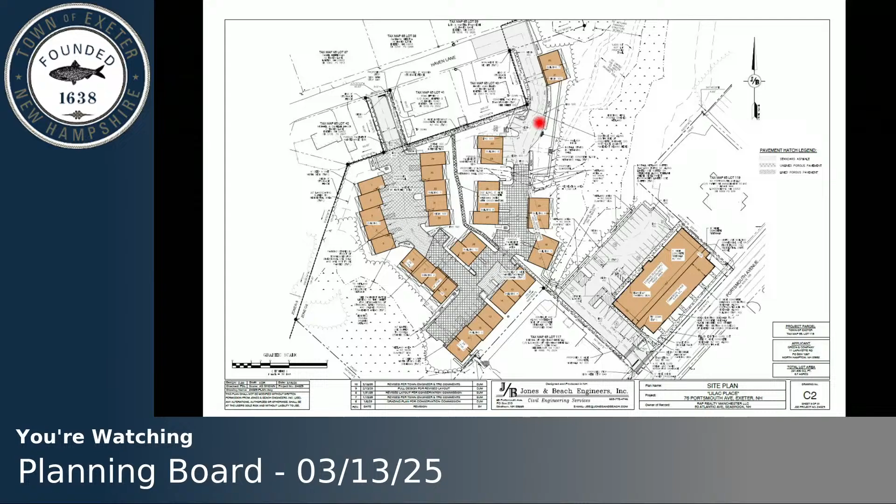The other change was addressing concerns about maneuverability getting into some of these buildings that have no parking spaces in front of them, especially building 2, and this building up here, as well as this one. We were able to widen the road in those sections to create more turning radius for vehicles to get in and out of those garages, and also provide space for them to back out without backing directly into the travel lane. That should address that concern as well.

The other change that we made. Mr. Chair, I'm sorry to interrupt, but we don't have this printout, so could you tell us the building numbers? Yes, and I did bring some handouts, sorry to interrupt if you'd like them. But it's really important to know what building you're talking about, and I can't see from here.

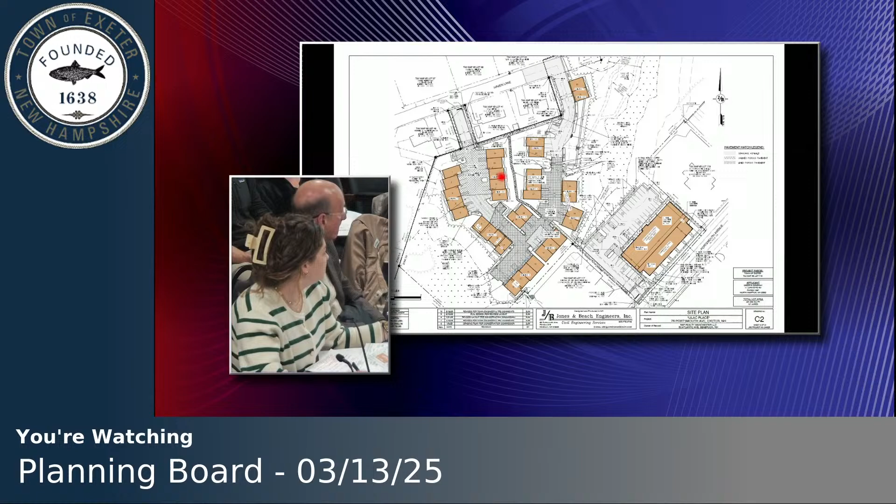The buildings that we've added the jogs to are building 2, building 3, and we did add some jogs to building 11 as well. There was 1 jog, but we've added a second one to break that up further since it's 5 units. So now our maximum width of a building is 5 units versus the 7 we had previously.

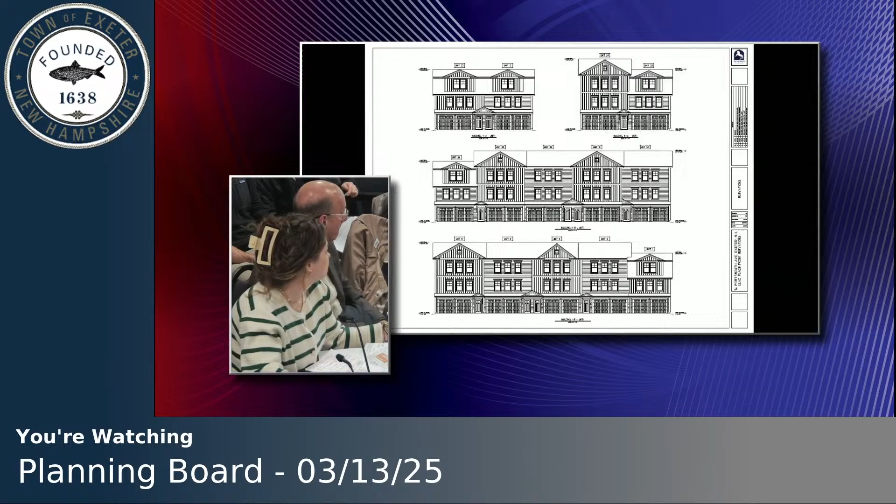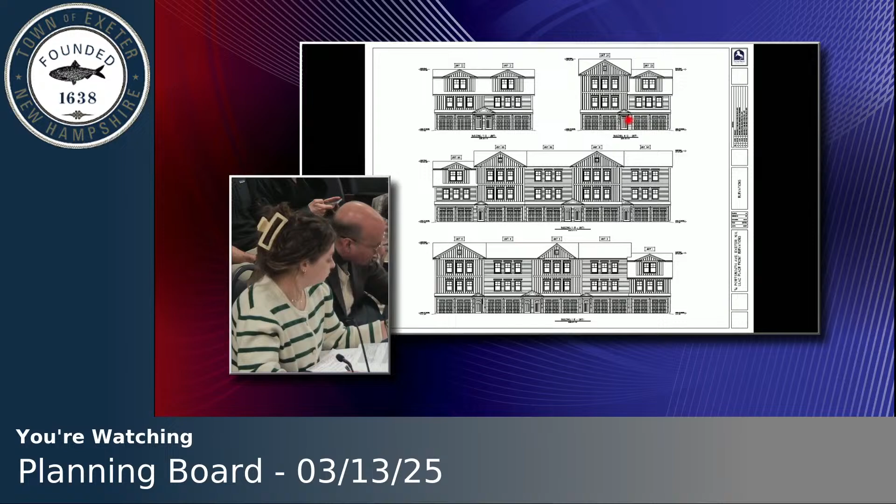The second page of that attachment is the revised architectural elevation. We took a look at some of these elevations, and on the buildings specifically close to some of the abutters on Haven Lane, we were able to drop the height of some of those units down to 30 feet tall instead of 35. So you'll see here, this is building 8, building 8, and then building 1.

And building 11 is the other one. So the units that are closest to those abutters will be 30 feet tall.

And again, these are preliminary. When we resubmit prior to our next meeting, we'll have a complete set of all of the elevations, because I know the board did want to see that as well. And it's hard to depict on these as well, the horizontal jogs in the building. It looks totally flat, but with the jogs that are shown on the site plan, that is how they will be constructed. So that'll add some additional depth as well.

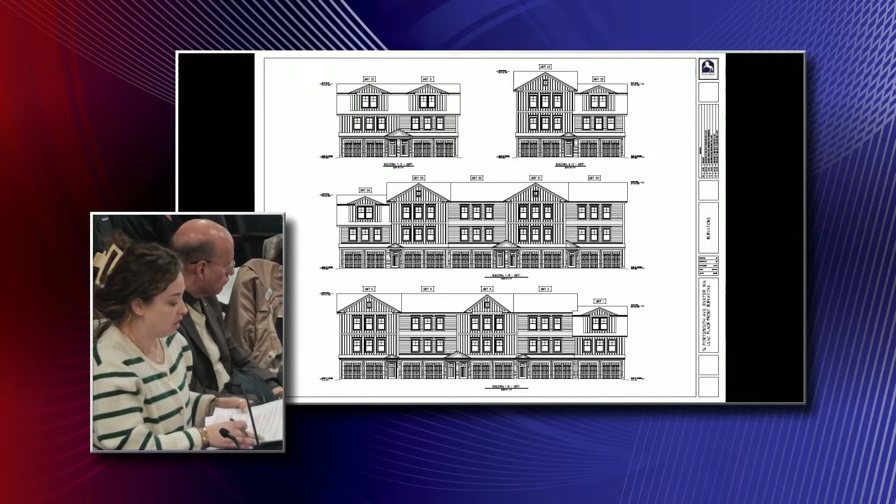So those are the changes we've made so far. We do also have the Underwood letter that we've received, and we're working on addressing those comments that they had on some of the technical details, and we will be resubmitting.

So the next topic that we wanted to get back into was traffic. Just as kind of a refresher, because I know some of the board members weren't here last time, we started to talk about the traffic memo, and the fact that Kim, our traffic engineer, has had conversations with Jason as well as town staff, and heard from the abutters about some of the existing traffic issues that exist in this neighborhood and along Portsmouth Ave as well.

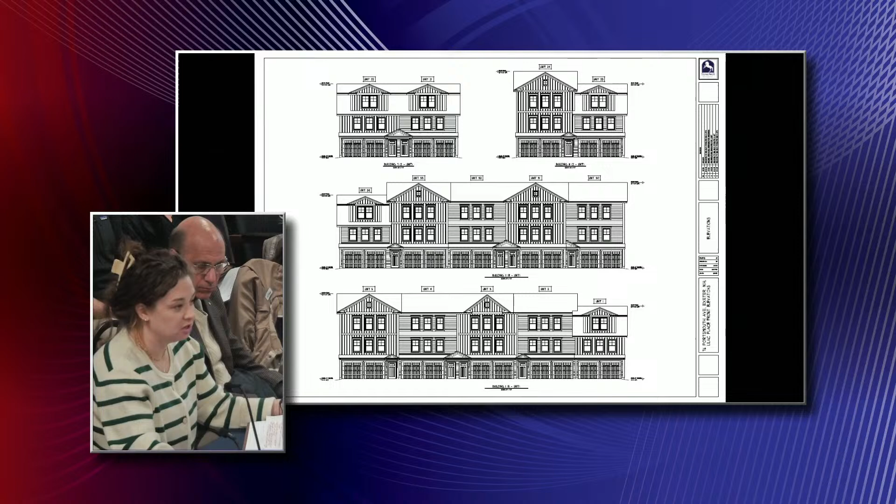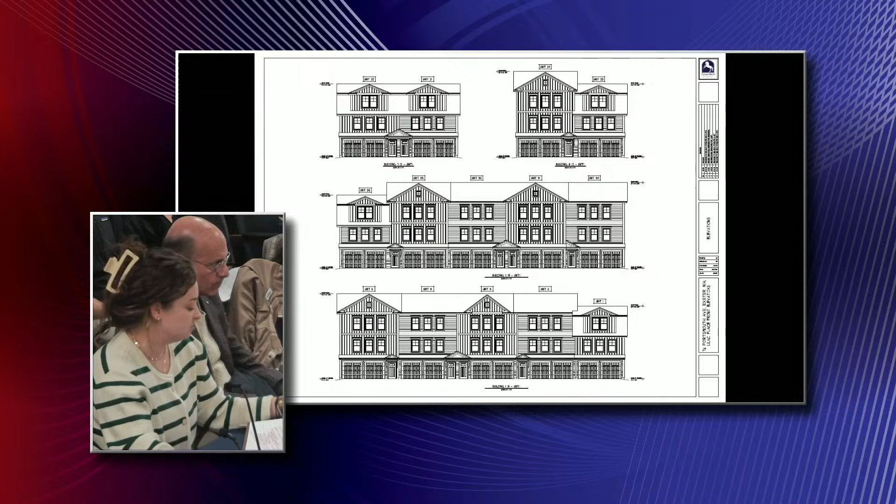So we felt that it would better benefit the town if we propose to make some kind of a contribution toward doing some improvements of those areas versus spending that money to do a traffic study that's just going to tell us the issues that we're already aware of. We felt it would cause a bigger impact to the town to try to improve those scenarios that are already existing. So Dave kind of summarized that at the last meeting towards the end pretty well, so we wanted to just get back into that discussion.

Okay, well, we have Jason Plourde on the screen. We do, and I'm happy to go over and minimize this if we want Jason to be on the screen too. Yeah, probably do. So yeah, let's do that and focus on the driving situation, traffic pattern.

I watched the meetings. I did. Interesting discussion.

I don't know how to actually get him up. Yeah, Gabe will do it. Okay, hopefully he's listening. He's listening.

Good evening, Mr. Chair, members of the planning board, Jason Plourde with VHB. Good evening. And I'm here to be able to help address any kind of questions and concerns that you may have.

Okay, could you provide us with an overview of where we're at with the traffic that you folks have done? Yes, so we had reviewed Dr. Kim Hazarvartian's traffic memo that he had put together dated November 5th, 2024.

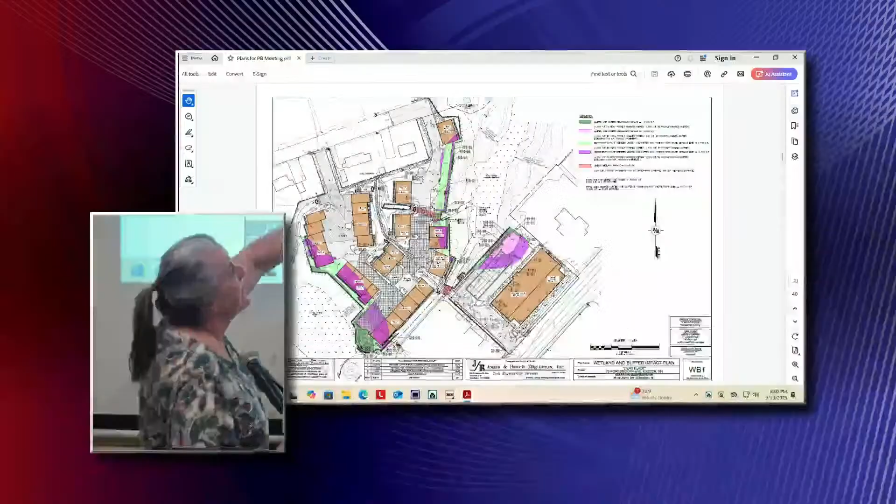Either way, we know that it's wetlands. When you build on it, you leave all this pink area, and it looks up here and it says poor drainage or something to that effect. I can't read the blur. I think what you're referring to is it talks about very poorly and poorly drained soils.

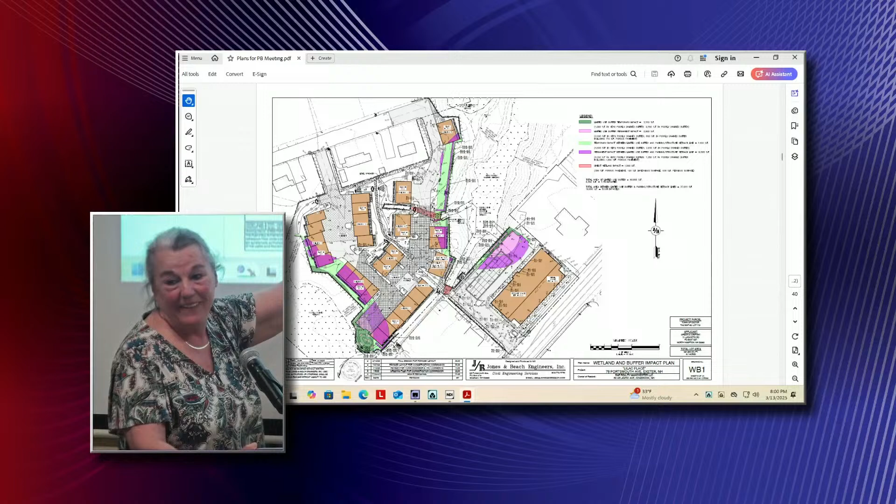But the colors that are shown are not very poorly or poorly drained, it's just buffers to that. So the town has different buffers based on what the soils are. The crow's feet marks are what you want to look at, ma'am. No, this is poorly drained, and this is the wetland itself.

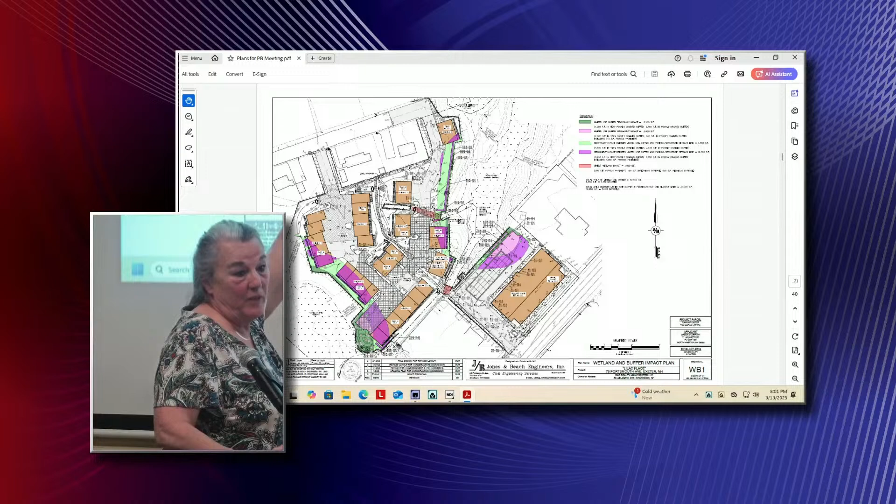See these little hatch marks? This is all against our land. So when they put all these buildings on there, where's the water that was originally going to be sitting there after a big rain or that huge snowstorm that melted a ton of snow going to go? It's going to be draining here, is what I'm thinking. And that's a potential for water damage. I'm curious, if that happens, who's going to be liable?

Just to point out, about 90% of the projects that come to the board have wetlands, so we have to deal with them. This is not new to us. The Conservation Commission has reviewed this very thoroughly and made recommendations, so we tend to follow their recommendations. It's a good question, really, and an obvious concern, no question about it. Wherever you go in Exeter, high or low, there's going to be wetlands right next door. That's just the way it is.

I wasn't trying to be disrespectful, it's just a concern we've been having. I want to reiterate, please give us a fence. We have this huge buffer now, and you're taking it away, which helps with the noise and the light. I would really appreciate if you include that.

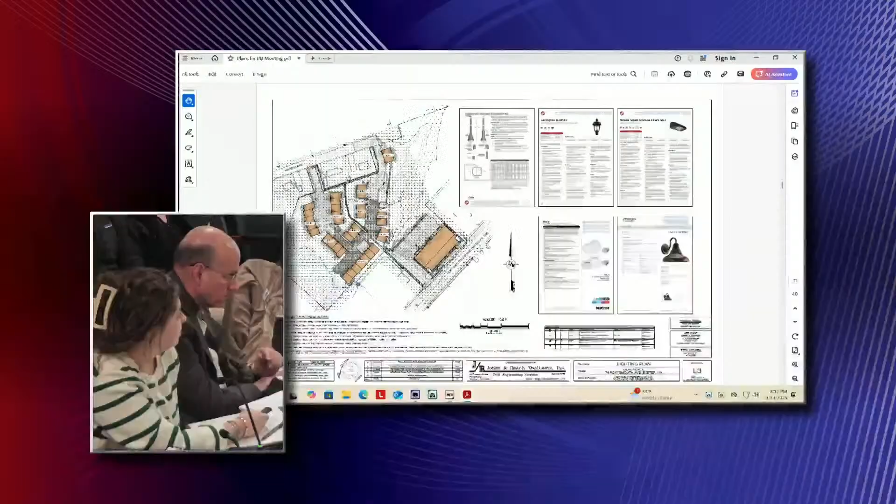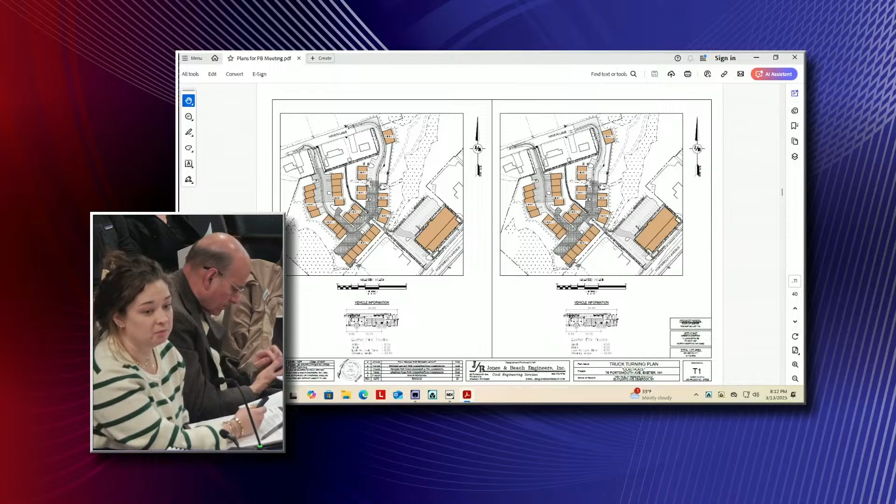We do have truck turning plans in the plan set, which show a fire truck coming in, making that turn, and then being able to exit. We did show the parking striping in front of the units. That won't actually be striped, but it's there. That came up early on at TRC just to depict that cars could be parked there and it won't interfere with a fire truck. But you were going to reach out to the fire department as of our last meeting. Has that happened? Yes, we have reached out to the fire department. I've not heard back. I don't think they had any further concerns about the truck.

The main reason we were going to reach out was regarding the hydrant location. That came up at TRC. We can certainly confirm with them again. It was also the need, why is there a need for that extra exit entrance? And it was, you said it was because of fire trucks, school buses, and deliveries. Correct. But no one had any information on what the fire department's position was. That was a request of the fire department at TRC. Well, there's no meeting minutes, so we don't know. Stay tuned.

Jason Fretz, the deputy fire chief at the TRC, was concerned about the original plan. They had to kind of get in, and then it was difficult to get back out. And then there was a suggestion made to loop it, and then they came back for that. It started with my question on whether or not that extra entrance exit could be gated and only used for fire apparatus, like we have at Sterling Hill. That was what started that conversation, if I'm not wrong. I could reach out to have a further discussion with Jason. Yeah, that's literally what started that part of the conversation. I recall that, and I think we took a look at that after the meeting.

Would it be one way? You'd have to go up to the mic to ask. Sorry, you can go back up. I can ask it for you. Would it be one way? This is currently not designed as one way, this is two way. Thank you. All right, now you got to go up.

We've been in the neighborhood for 28 years, and when a fire truck, probably about 25 years ago, tried to maneuver in that corner because we live straight on number 30, that fire truck went round and round the neighborhood. And that is the widest area.

If you've been through the neighborhood, I do park my bus in front of my house during the daytime. And I was told that any cars, well, we have a guy that parks his trailer on the road on Bonnie Drive nine months out of the year and doesn't take it off the road.

However, a fire truck, especially the extended ladder truck, to take that right turn, they're going to have to try it. They'll have to maneuver going up and around because it's a straight truck. It's not going to be an easy turn. So that's why the concern was inquiring to the fire department.

And as for the fire hydrant, it's in front of our house, so it's not far, but I don't see how it's going to maneuver. If it went one-way traffic, and once you start getting people parking in certain areas, that's a bit of a concern if it'll fit. That's just my question, my concern.

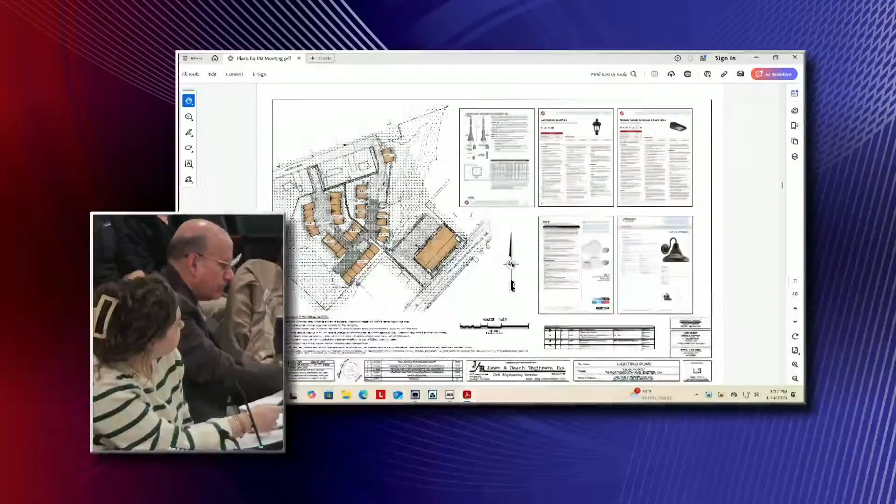Can I describe the process that goes through? The process is that the developer creates a truck turning plan, and Jason also provided the Exeter fire truck dimensions to us as well.

We used those dimensions to run the template. They provide the truck, and it creates a template to show the turns, and it shows you can make them. They review that. Sometimes you can make it if you do it perfectly, and if you don't do it perfectly, sometimes you run over stuff, and that does happen. But to the extent of this, it gets reviewed by the fire department, and they say okay or not, and they were fine with this proposal, that they felt they could get in and out.

So does that apply to school buses too? Right, thank you, because that was the other thing, the length of the vehicles. You said you needed it for school buses. Yeah, so the comment that came up about the school buses from Underwood, they asked us to run the school buses. That's not something we ordinarily do.

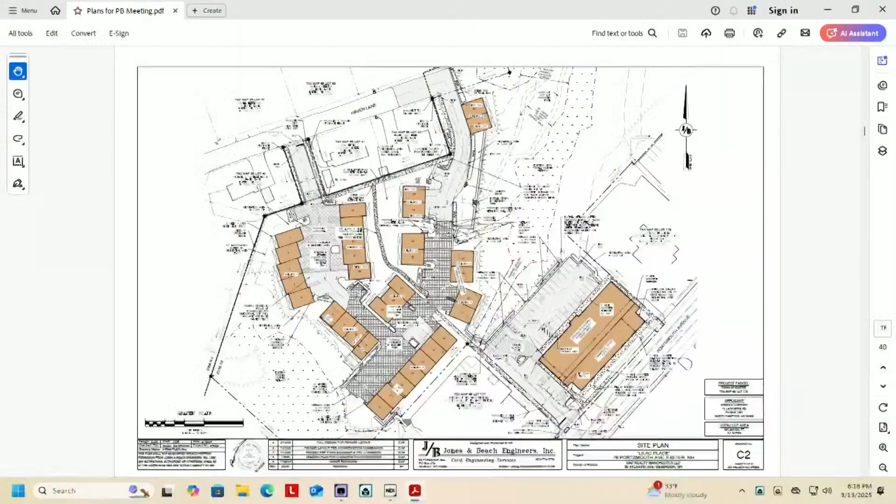So where would the kids in this development get the bus? At the end of this neighborhood, I would guess, but I don't know, maybe at Susie's house, at the end. Where are children picked up at this time? Right now, they're at the corner of Bonnie and Green Hill.

They take a left onto Clover. I take a quick left onto Clover. It's the hardest neighborhood to drive a bus, one of the most challenging bus routes, because the traffic is crazy for the kids. When I let them out, these children go toward Clover, behind and around the back of me, and down Bonnie Drive, so they're dispersed in many directions. And you just tell them, make sure you're safe, look both ways for cars. It's scary, and everybody's racing for that stop light.

Thank you for being a bus driver. Thank you very much, that's a job we don't recognize enough. We've got a lot of people like you who get all our children to school safely. Thank you so much.

Well, I think we're pretty well set for this evening, and I would look for a recommendation, or a motion perhaps. Mr. Chair, can I just ask a quick question? Sure, just because I think it could be addressed in the revised plans, if it's something that could be addressed.

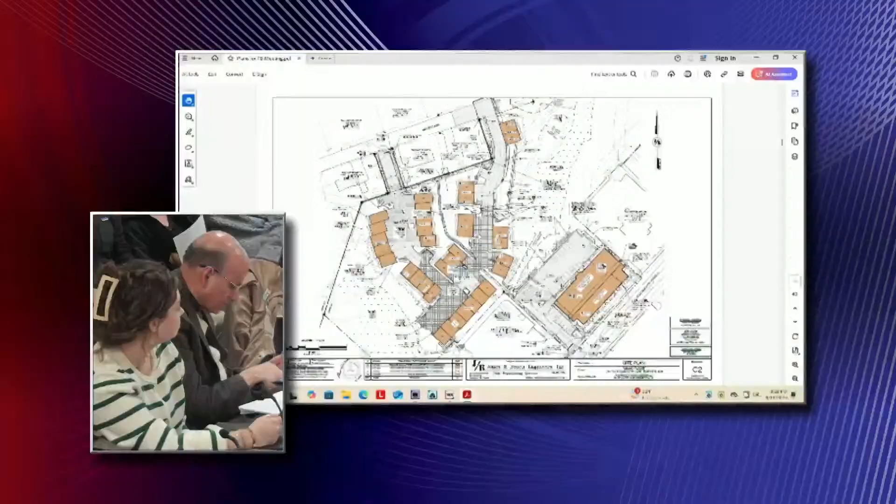No, we do have a phasing plan which shows where the sidewalk will go during phase one. The sidewalk comes basically right down the edge of their parking. We've shown them our limit of construction, so they know their parking will be temporarily impacted while it's constructed, but once complete, they'll be able to park again up against it just like ordinarily. So it runs right down that property line.

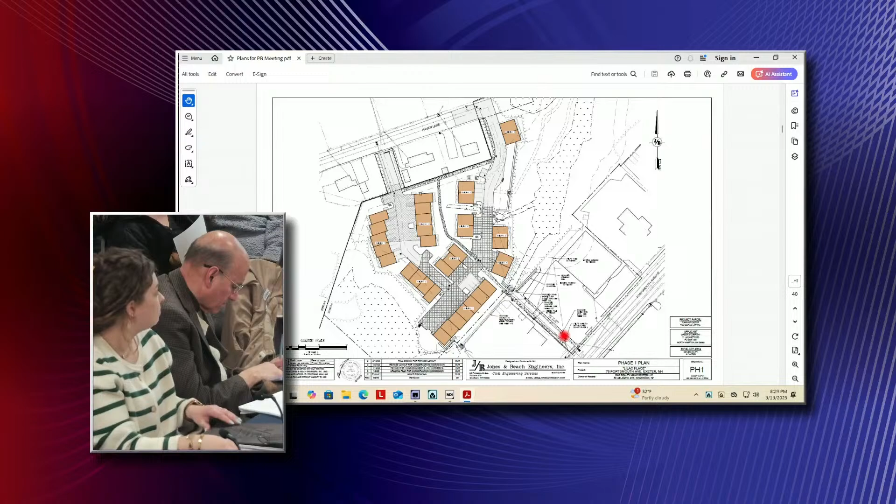On building number 7, you showed us a couple schematics of a 30-foot building rather than 36. My question is, since those don't have garages, it seems that could be applied to those buildings, or make it a little playground for the neighborhood. I don't think it was 7, it was 8, 11, and 1, right? Correct. Was 11 too? I'm sorry, was 7 included?

It's these four in the rendering you handed out tonight. Let me pull mine up... so it's building 7, 8, 11. Oh, it's not 7, 7's not shorter, 7's the same. Okay.

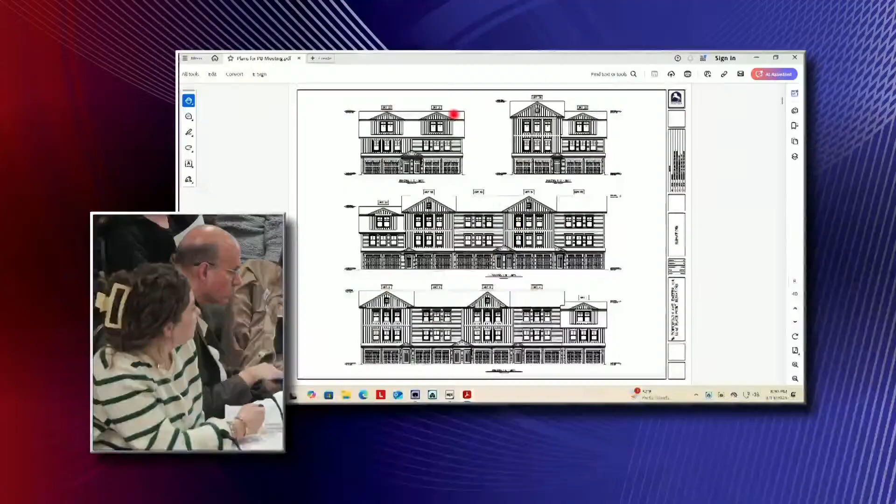So building 7 is the shorter height. That's what this one is right here. Oh, the whole thing is shorter, it's not a step down? Okay, that's what was confusing me.

Got it. Okay, so I think they're gonna bring them next week too, but you can have them in the meantime.

Are you ready with a motion? Yeah, so I'm going to make a motion to continue planning board case number 24-8 to March 27th, 2025 at 7 PM at the Nowak room. Second. Moved and seconded.

Does that work for you guys? You gonna get plans by the 20th? We won't have the rendering, but we'll have everything else addressed, the Underwood.

Do you want to come back, or do you want to wait until you have the first meeting in April? Well, could we come back, could we resubmit with the plans, then bring the renderings to the meeting? That's up to the board, I guess. How's our agenda in general?

Open right now. Okay, so how do you feel about it? It's okay. I mean, the renderings, that's not that technical at this point, it's just modifications really. Looking at views and stuff, the visual is more important. But how much time do you need ahead of the meeting for that?

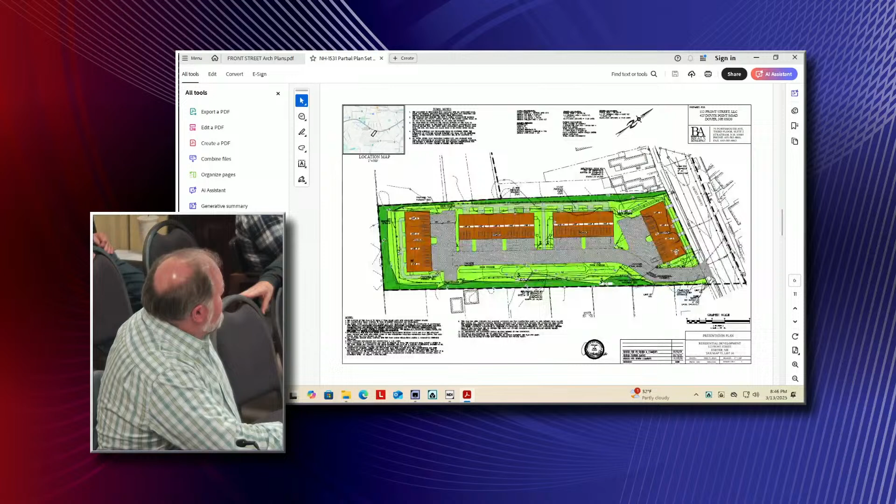And how close is that building to the property line? From the property line, it varies. I should say from Front Street, from the sidewalk, you're looking at about 10 to 12 feet, because it's not a perfect parallel. Yeah, that's what it was.

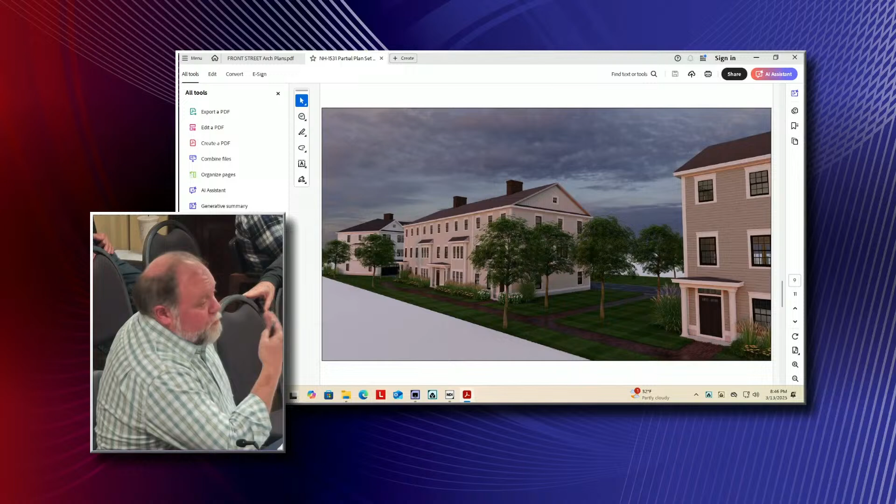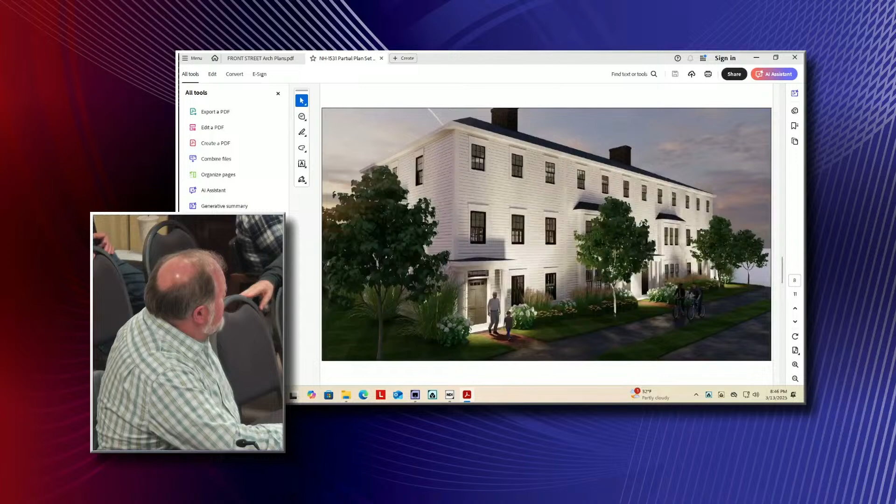And this is a view of what would be the rears of the building to the parking area. You can see the walkway, it's a little bit dark in that particular slide, but that's got the walkways back there. It shows the proposed landscaping, which we did provide a revised landscape plan as well, done by John's designer.

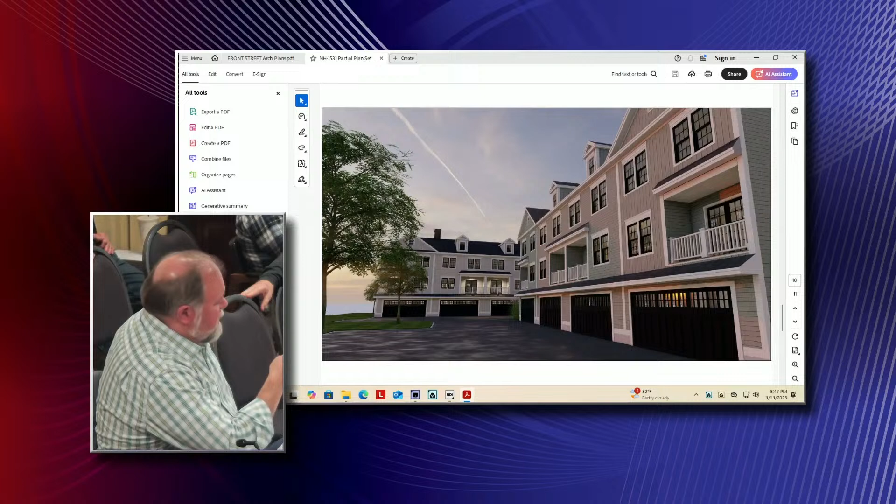And there is a view from the interior of the property looking at the garage entrances. That building in the back is the furthest one away from Front Street, and the rear of that abuts the cemetery. I think that's a 4-unit building. So the front of the back building is facing the cemetery. Correct, yeah. And the garages all face the drive aisle.

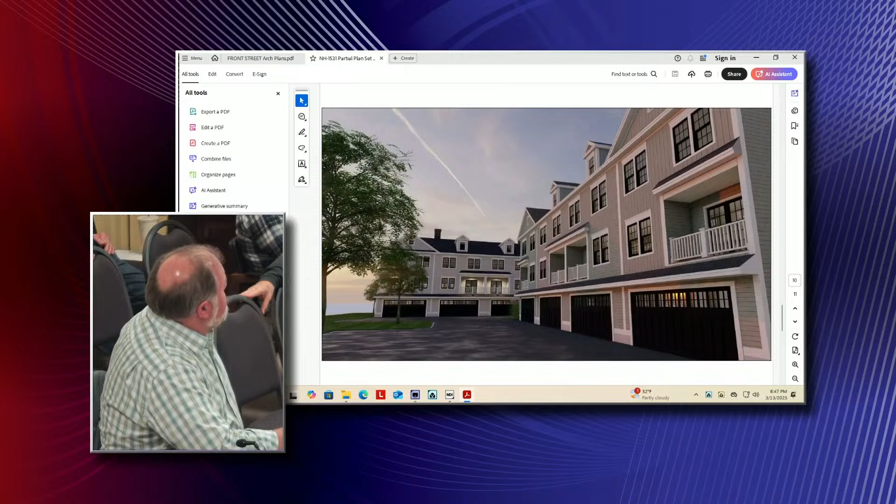And let's see, yeah, the use of a little color there is good. That helps separate them a little bit. And you can see again, he did dormers, and he changed the gables on the ends of these units as well, to try and address that plain look that you had discussed in the previous hearing. Oh, that's good.

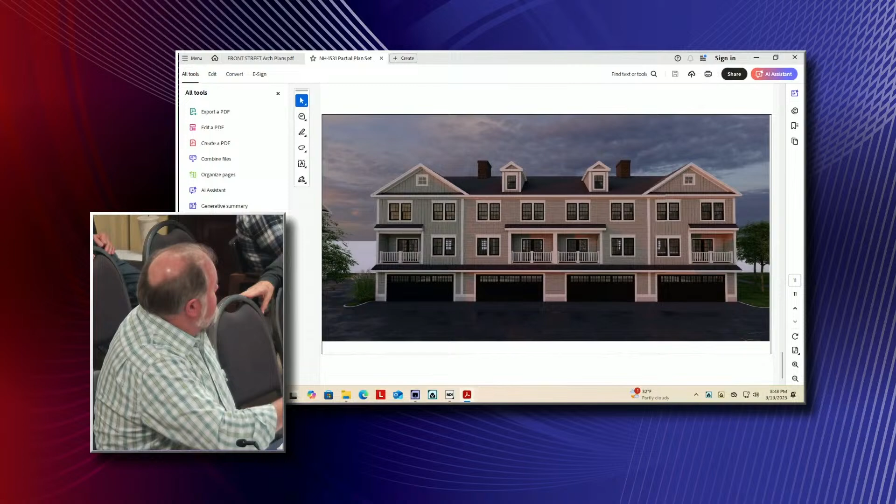And with the revised drainage, the revised entrance, and those differentiations in the architecture, that is the lion's share of material changes to the design itself. And we did incorporate much of the comments, or edits, to deal with many of the comments in the final Underwood letter as well. So with that, I'll entertain any questions you folks might have.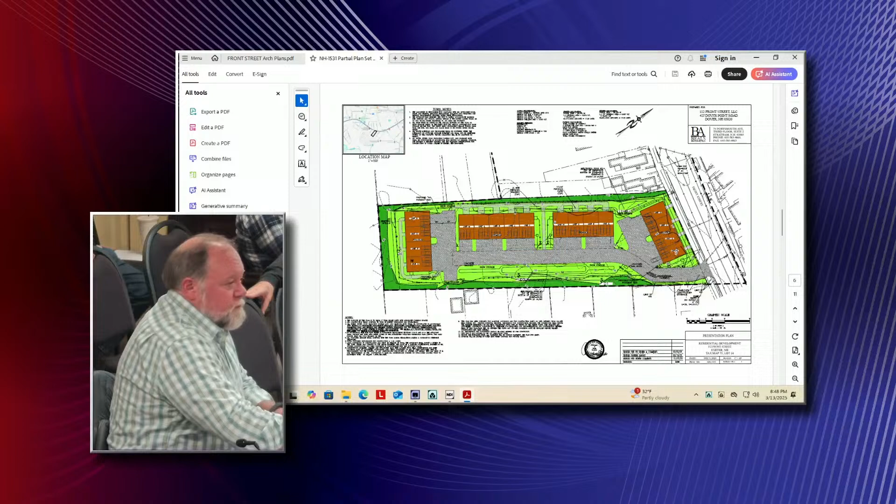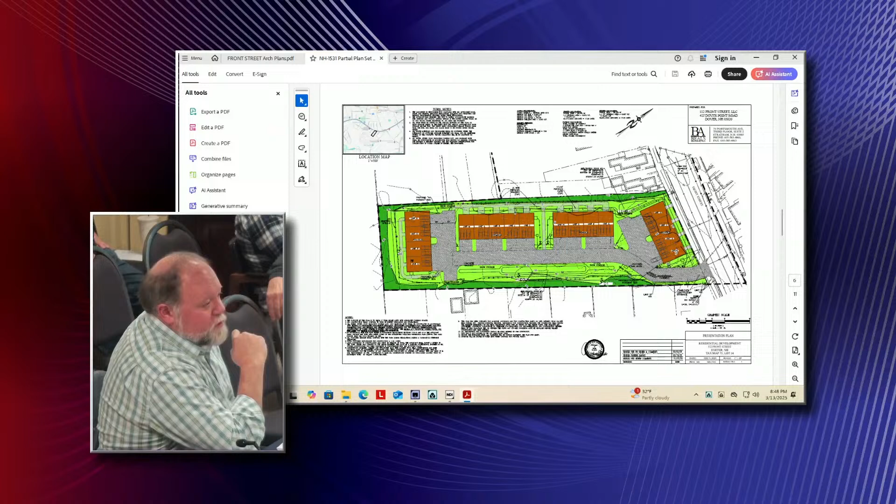Address the waivers when appropriate. Did giving the driveway 5 feet affect the location of the front building at all? We had to slide it just a little bit, probably 4 feet. I think we had to slide the building 2 feet, just to make sure we have enough area for the vehicles to make that initial right-hand turn.

And then, if that's the case, approximately how close to that single-family home? So it's still going to be in the neighborhood of 20 feet. 16? I can go to the microphone if you need me to.

Questions, comments? Oh yeah, that's right, excuse me, go ahead. I apologize, the building on that side of the footprint didn't move. We took a foot out of each of the units, so we shrunk the building a little slice.

Coming from the southeast, so is that distance the same as it was before? Which was, I think, around 10 feet. We meet side setbacks on that side by a couple of feet, and then it's whatever the distance is from the property line to the existing building on their property. But just to clarify, so the western end of the building has not changed from the last time we had the plan? Correct, same spot, yep.

Questions, comments? A lot of paper shuffling going on here.

How about where the driveway is 5 feet wide? What's being done with the landscape drawing? There was some fencing there, which would be necessary to keep headlights from people turning in. So the fencing is going in there. There are some plantings that are going to be installed on both our side of the property as well as the abutter side, in collaboration with them.

We have also added that same fence along the abutting property with the folks that own 9 Gill. So the fence is not solid all the way back, it's partly based in what the neighbors have. I think we've got about 98 linear feet from the front, and then there's a gap, and then I think it's 60-something feet, 69 feet across that.

Well, I just want to make sure that all the neighbors have had that opportunity, and I sense that they have. I just want to be sure of that. Dave was saying earlier, what we treat one party with, we need to treat all of them. I see a head nodding no, so there's one abutter you need to talk with on that, I guess. Same thing on the other side?

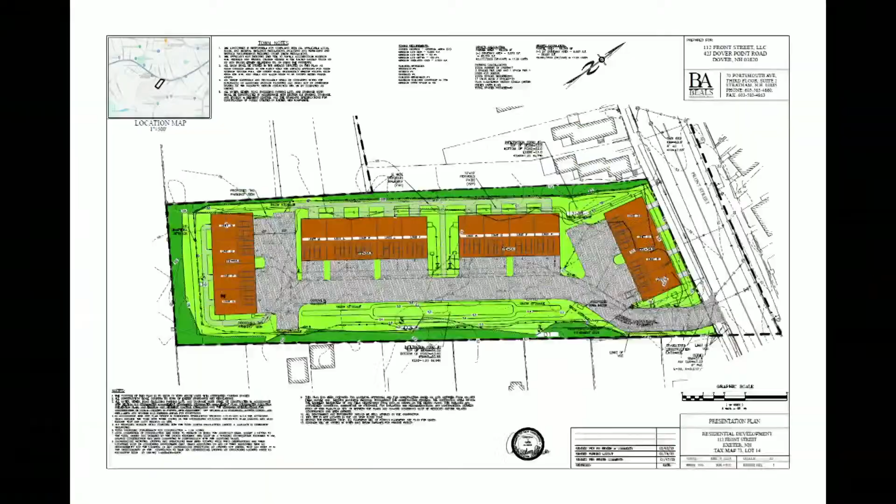No, on the other side, you can see all the existing trees as well as the in-planting trees that the designer has added. All of the existing trees, plus she proposed plantings within those existing trees to provide a better buffer and a better screen, but no fence that I'm aware of.

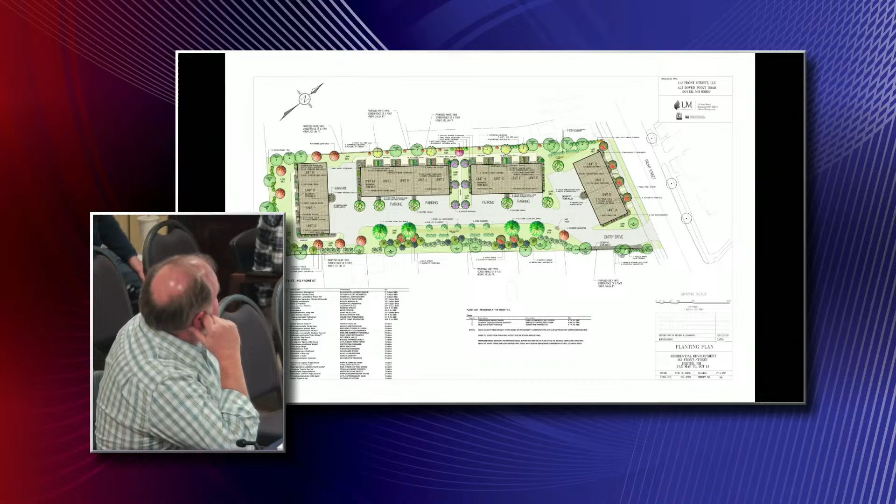John, am I incorrect on that, on the northerly side? It's 106 feet on the plans. Yeah, there's a fence along the whole right-hand side, Christian. The neighbor's got one, and we're continuing down, almost halfway down, to a white fence. See the note top left? The proposed white vinyl screen fence is 6-foot height, 106 linear feet.

But then it breaks up, it doesn't go the whole way - there's 106 feet, then 24 feet, then there's a break, and then there's 132 feet, in three sections. I think what she was intending to do with those sections is not put fence where it would damage existing tree roots, as the plant plan showed.

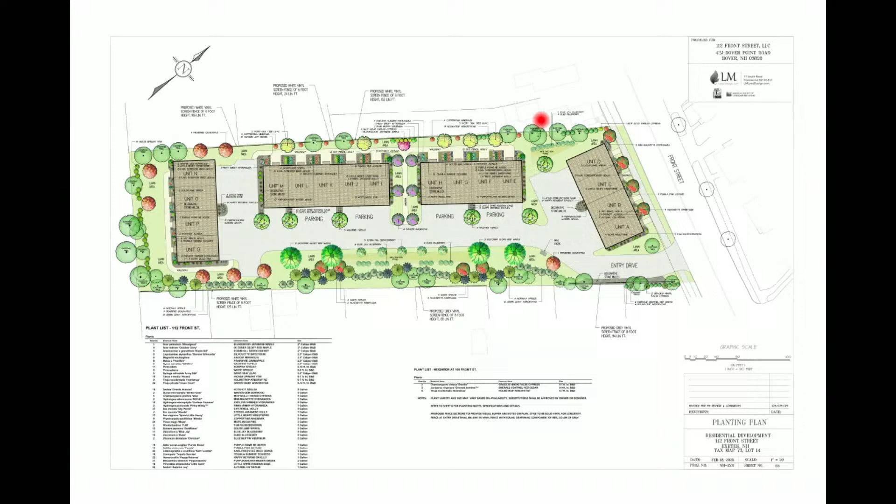As a matter of fact, one thing she did add, when you're pulling into the first building, she created screening so that there'd be no light damage. Could you use the microphone, please? Yes, we added screening so that there'd be no light pollution coming through as you drive into that first building. So she blocked that all off.

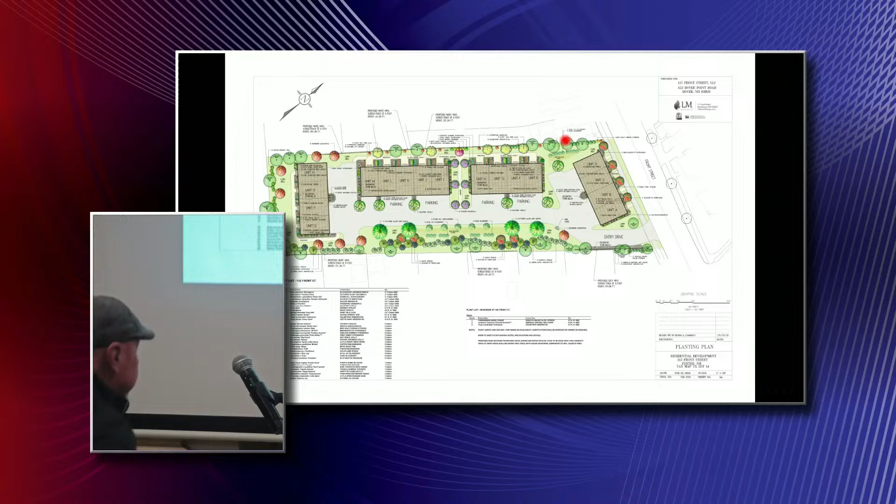Why are some of the fences gray and some are white? I believe that was the abutter's choice on the gray one. And the gray one's actually going to look like stone. It's a beautiful looking fence, 8 foot tall. It has sound capability as well. I don't know if we have a picture of it, but Adele, you've seen it - it's a good looking, very good looking fence.

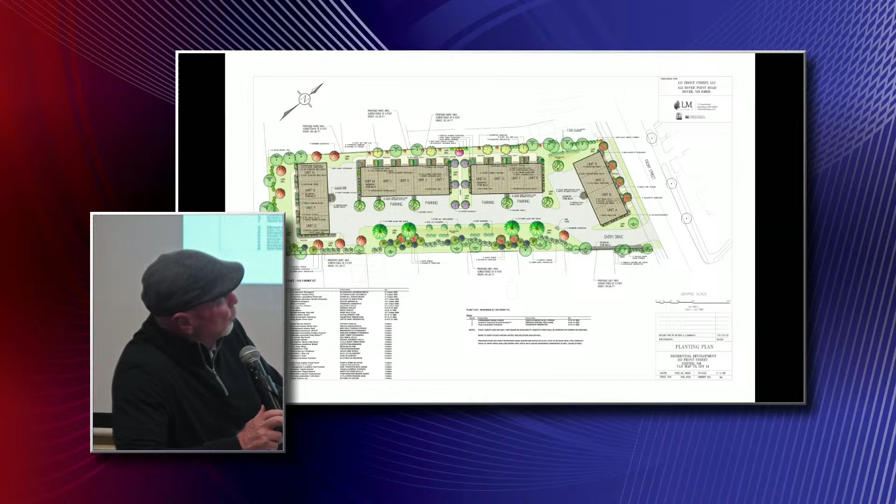It's a vinyl fence, but it's not just vinyl - it's vinyl both sided with a sound rating in between, and that's 8 foot tall. It makes sense, she was the most aggrieved with lights coming in there, and we planted trees there as well. But we didn't think it was necessary to do it on the whole property, because the other side of the property is already covered with the white fence.

Well, that's good, because all the traffic coming in and out goes right by that, through that driveway. Exactly, of course.

Nancy? No, a lot of my concerns have been addressed in this, most of them, yeah. I'm good, thank you.

Thank you, over here. Okay, that's beautiful, thank you. Oh, there we go. Do you mind if we pass your phone down, you can just come along with it? Keep touching it so it'll stay on. If you come along with it, you can hit it if we need you to. Oh, I see. Thank you, I'll bring it over.

Oh, that would be a little sound deadening. Final? Wow, okay. Do you want it? No, I've seen it. Mr. Smith, I'm going to put you through your paces right now.

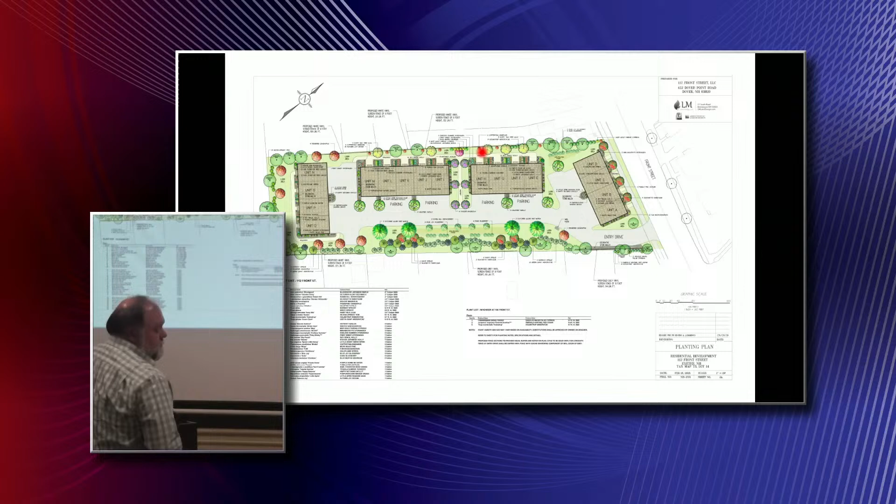That last lilac, and nothing else on down to the... So the front third to the street is existing vegetation - there's no additional fencing there, right? There's an existing fence on the neighbor's property. How tall is that fence?

6-foot white vinyl. But you also have additional plantings, so that plantings should help keep headlights from the existing fence going across. I think she's got them on here.

That's why I'm asking you to go through this. I can't read it - if you look at some of the trees there, does she have the existing fence? I can see that. I'm saying the existing trees - she doesn't show the existing fence on the front section because obviously the surveyors didn't trespass to get the location.

Okay, all right, well it'd be helpful to have it. We can certainly stand on our property and see the fence there - I guess we can see it, just add it to the plan, because it's a detail that I think is important. It's important, sure, you know. Oh, it is, yes. Not a problem, thank you.

I have a question about the architecture. In our packet, there's an elevation facing Front Street. There's A1A and A1B. What's A1A and what's A1B? I believe... Sam, can you get on there and switch to the other drawing?

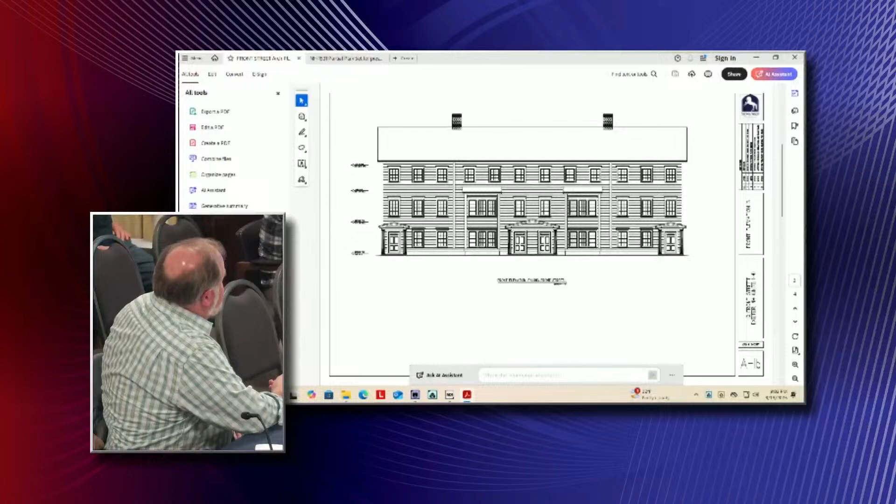So which one are you proposing? What are we looking at? Which one's right? I think it's 1A. Let's go back to the first page. That's the front, that is the front. Front Street, right there, front on Front. No, you have two, but then they say they're on Front. Flip to B.

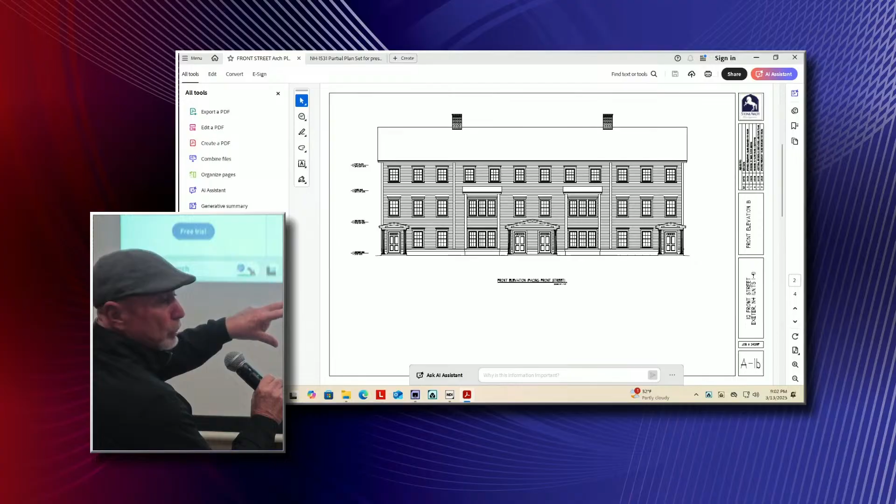So B is not Front Street. That is one of the side buildings. It says facing Front Street, but that's a mistake — it's not. Oh, okay, so that's just architectural. That was the architect being misleading. In reality, we're doing the hip roof on Front Street, so the hip roof's on front. This is for the other three going along the side, and then we're going to do a hip roof along the cemetery. So hip roof on two ends, and then there's the back of the Front Street building right here. So B is the two perpendicular to Front Street. Right. Okay, thank you for clarifying that.

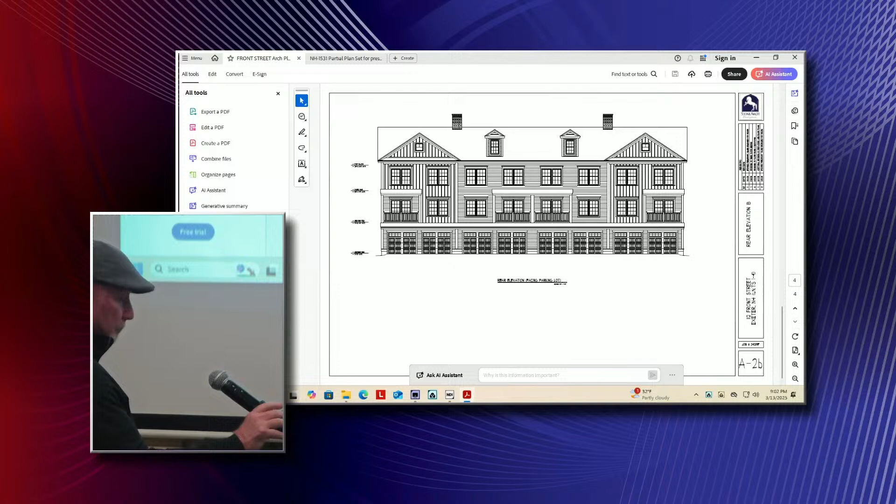Okay, thank you. So I also have a comment to follow up on that question. I really appreciate those 3D views that were done — I think they're really helpful to see, as opposed to just the flat drawings. I can't get over the feeling like these buildings are backwards. Even before, we were like, so that's the front? No, is that the back? What's the front? You're inside the community.

It is the front — I mean, really, these buildings are all gathered around this central space, even though it's basically parking. Well, it's unique, the way they kind of create this U urbanistically. I feel like all the fronts of the buildings should be facing there, and then you've got these beautiful frontages facing the backyards, facing the neighbor's fence and trees. It's like a backyard — I wouldn't want the front of my house facing the back of my neighbor's house. That would be weird. Well, you have to have function, and the function of these buildings is you have to drive in, so you don't want to create any more pavement than you need to.

So this is a nice-looking building, in my opinion. It doesn't look as nice as the other side, but this is what people are going to see as they drive in right here, because they have to have function, they have to drive in. Yeah, so it's function versus reality. But I mean, we saw in the other project, you had the garages and then the front doors were in the front. But remember, I don't even think architecture is part of your purview in this particular zone.

Nothing personal, but I don't believe it is — oh, actually I believe it is, yeah. We can comment on that. Well, you can comment on it, but your regulations don't have any architectural standards for multifamily in Exeter. And I think, Jen, the intent was just to have the more aesthetically pleasing side of the building facing the abutters closest to the abutters. So in order to get into your house, you've got to open the garage doors to get in from this side. Correct. Yeah, this isn't just about aesthetics.

So what's the finish on the outside of the back of the buildings? We're going to be using a wood product - SmartSide, very nice product. The windows are going to be all black, and we're going to change the colors. I think the diversification of colors makes a difference, and to make them look better we cross the striping and the pattern, so you get the board and batten look. We try to make it pleasing, we really do. It's not a typical townhome, but it is unique.

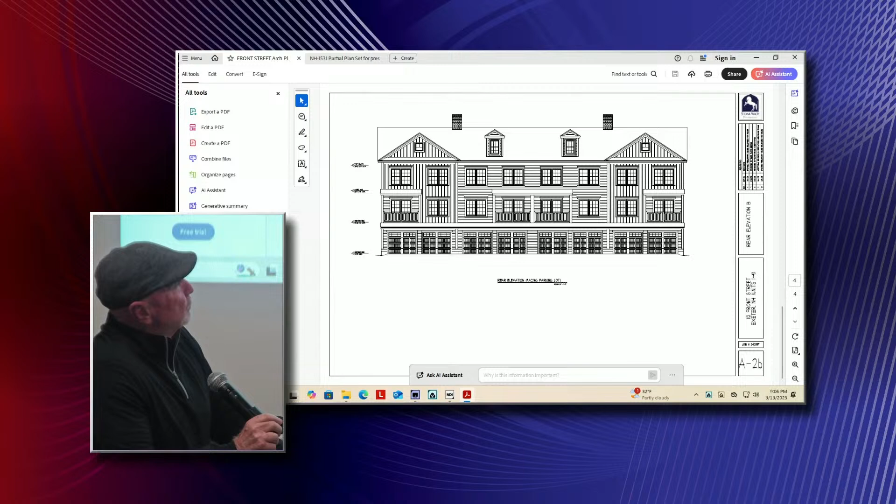I understand what Jen's saying about the other project - it's driven a little bit more, and it takes away from what I think is the better function. These are very, very nice functioning units. When you have a two-car garage to drive into, guests will park in front, but they can walk around back. They have a nice walkway, there's a nice finished room in the basement, and it's pretty private out back. We thought it was the best use of the property. I like the building an awful lot, I really do.

Looking at it from another angle.

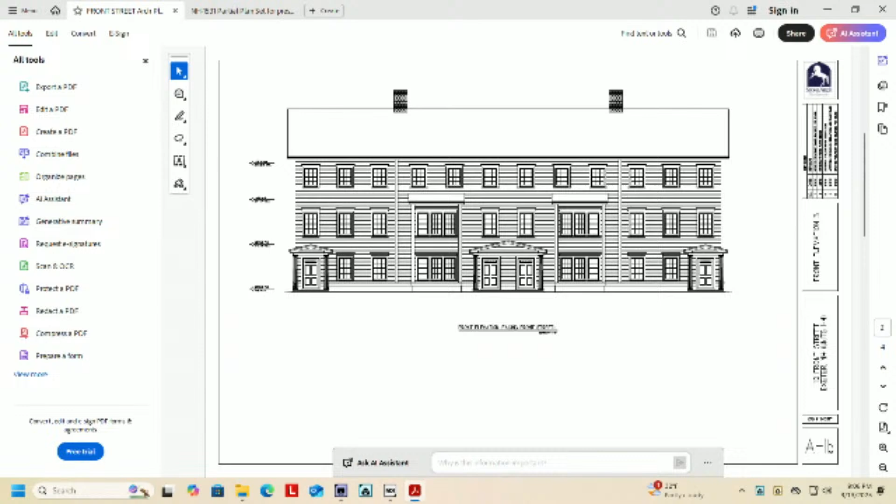You want to see the gable one? That's one of the side buildings, looking out at the neighbors, to be quite frank - so that's what they're going to look at. How much distance are we off the sideline on that particular road? When they walk in on the right-hand side, how much space do they have between there and the fencing and the property - 25 feet, 30 feet?

So for the two middle buildings, behind the building? I'll have to get back to that plan to give you a handle on it. It tapers a little bit, it's not perfectly parallel, but somewhere around 20 plus feet. So they get a nice backyard in there, and they have some privacy as well - that's their private area, it's their function.

But the functional area has to be the garage - you have to get into it, they have to drive in. It bugs me, I'm sorry. We've done this in Portsmouth and Dover, we've done it in a lot of communities, it's been done in Rochester. We do this quite a bit, and it's very successful.

I've got to say, Jen, I live in a single-family home and I've got 3 exterior doors I can easily use to go in. But 9.5 times out of 10, I pull my car into the garage and go through the basement and up the stairs. That's effectively what they'll do here. Yeah, most people do that - I think that kind of goes with that type of house.

Can we see the front street view of the front? Is that not it? That is Front Street. That's the hip roof. And it's a white building?

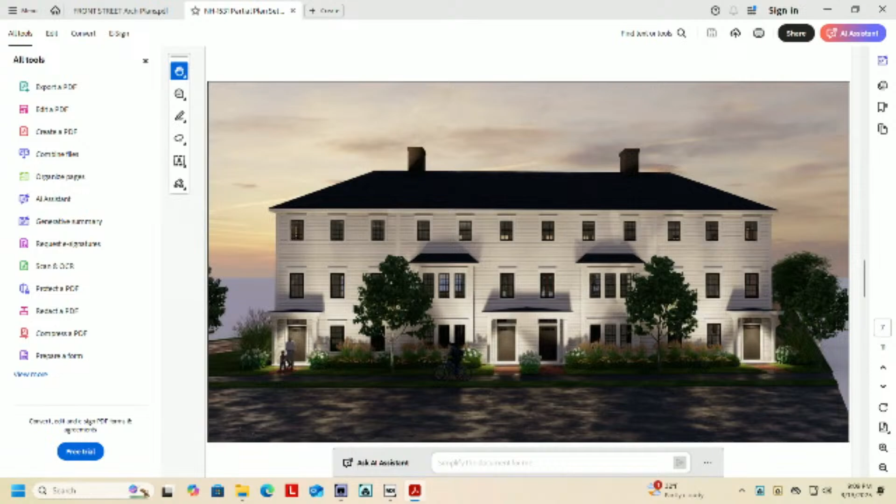You apparently have architectural say. Have an old farmhouse, that's all. It does break it up more. No running water, no electricity. This is a little different than what you put in our package though, it doesn't have the same windows.

So you're saving as many trees as you can, mostly along that, well, all around. Existing tree, right, yes.

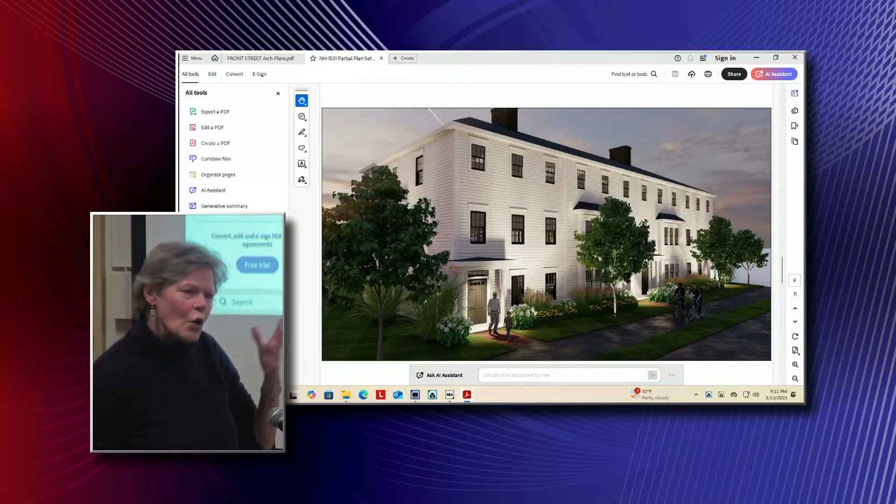Yes ma'am, my name is Dale Atkins and I live on the corner of Front and Gill. This doesn't show the size, the mammoth building this is. It's like a fortress compared to the surrounding houses in this neighborhood. It doesn't relate any way, and there are going to be 4 of these massive buildings. The whole thing seems totally inappropriate, and you have so many, it should be 10 units at the most, as opposed to 17.

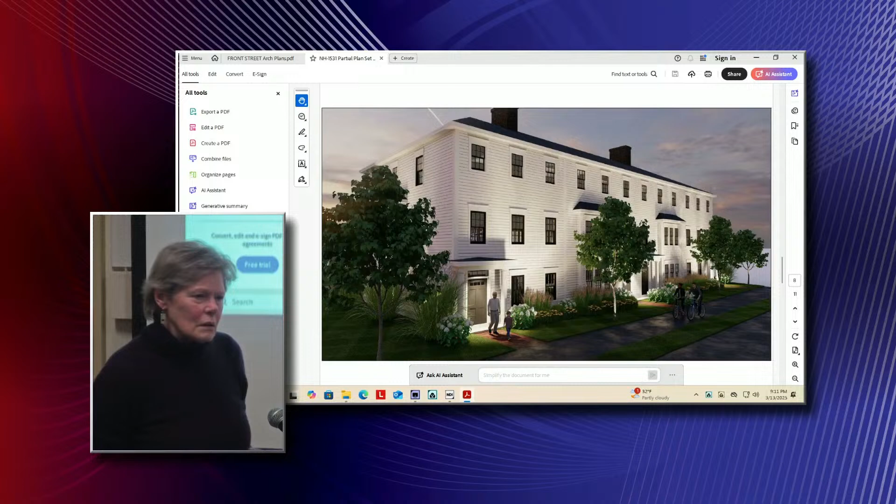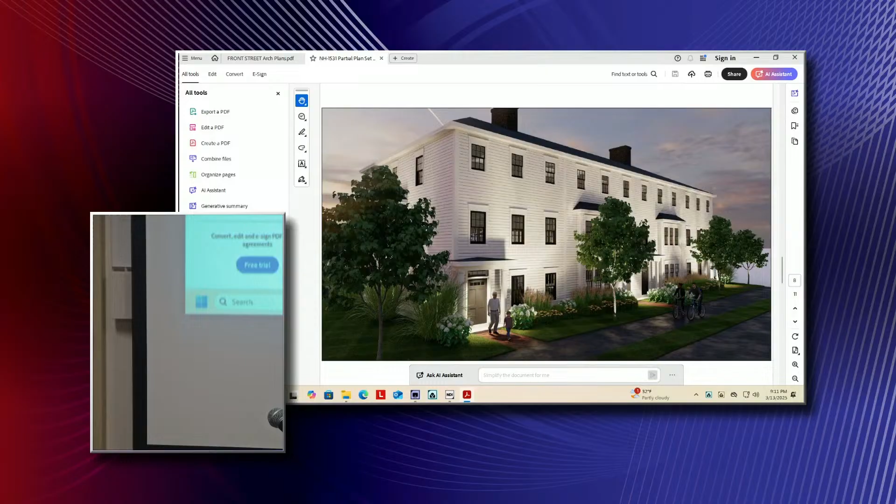How tall is the existing house? Do you know offhand? I don't know, do you guys know? Approximately 30 feet, so this is taller than that. It's in the same range.

Mr. Palmer, you go with this. Oh yes, come on up and speak if you'd like. Bill, 111 Front Street. The approximate height of the current building is 30 feet, so we've got at least 4 feet higher than that, for perspective. I've got some other questions, but that was, I wanted to come to the microphone to do that.

That's probably not, that's the back. Good evening, I'm Bill Campbell, 7 Riverwoods Drive. I'd just like to make some additional comments to what I said in the last meetings.

I'm wondering why we're trying to jam 17 units cheek to jowl in this lot. Seems to me to be a bit much. I have trouble envisioning 4 large solid buildings, each 96 feet by 24 feet. Actually the other one is 120 by 24, and each of these massive buildings is about 35 feet high. Does this massive set of 4 buildings fit into a neighborhood of separate single-family homes, each of which is on a separate lot? Do they fit in with the older homes on Front Street, which was the initial claim of the builder back in January?

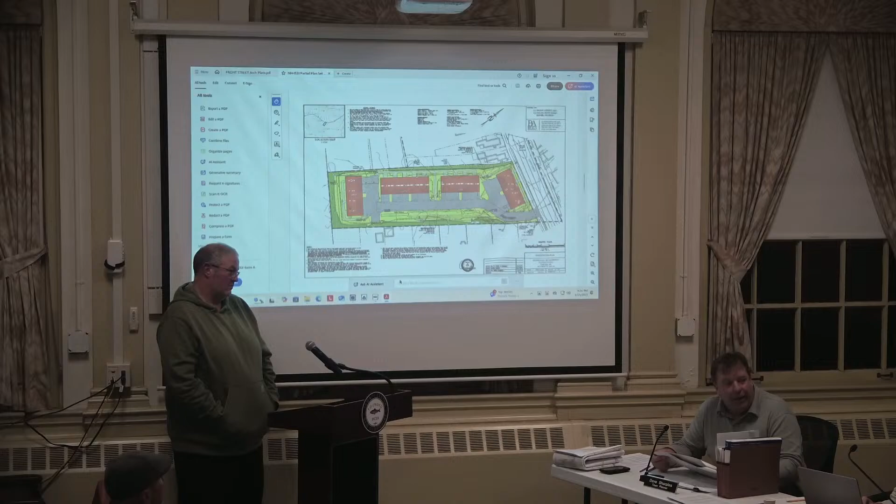You take that square footage out, and the parcel area is 69,349 square feet. You minus the driveway area, 24 feet, 9,687 square feet you take out. You got 59,661 square feet left. You divide that by 3,500 square feet, and it's 17.05 units. So it's allowed, that's what they get.

That zoning density predated me. It's been that way, I don't know how long. Had I shortened the road even further and condensed it, I could get more yield, to be quite frank. It's just a matter of taking the road out. And this is the business I'm in, unfortunately. I'm a land developer. I build and develop based upon the rules handed to me by the community I'm working in. So I looked at the rules and I adhered to the rules. That's all I can do.

Mr. Chairman, if I could, just very quickly on the density - I understand this looks like a lot of density, but this is also a 1.6 acre lot, which sits in the middle of quarter acre, third acre parcels. The front lot to our southeast is a fourplex on 0.33 acres of land. I think 11 Gil is a duplex on 0.28 acres of land. This is not outlandish density that the applicant is requesting here.

But I just want you to look at it - I think I'm comparing it with the rest of the neighborhood too. Understood, but there's not such density anywhere in that neighborhood. He just went through a couple examples though.

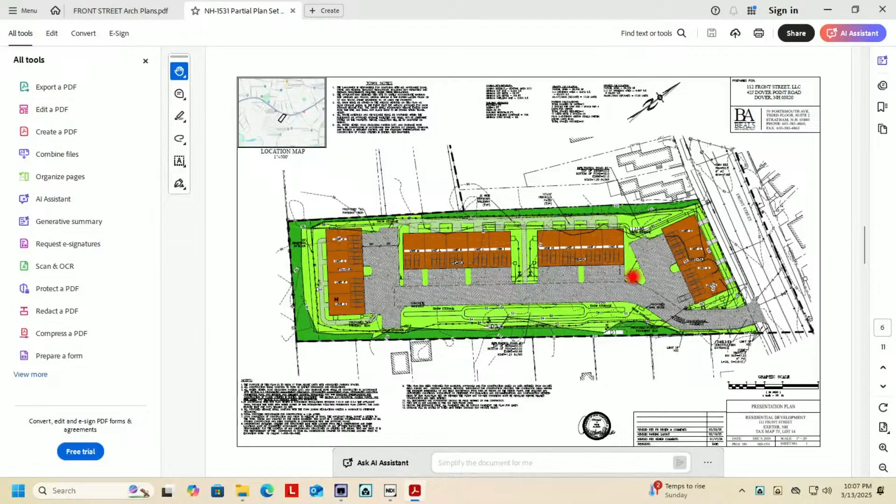The way I took what he said a few minutes ago, it was going to be there and there. And the homeowners documents, the draft - have you done that at all? We talked about that on the site walk, and yeah, that's a requirement, it's always a condition of approval.

Because it has to go through your town attorney as well, they do a review. I know we've done them, and we've seen them - it's usually done before. Condo docs are a state requirement. So planning boards can't require that to be done prior to approval - they can make it a condition of approval.

That's a concern we've been told about - a state dredge and fill permit, the condo docs need attorney general approval, because the attorney general needs to approve the condo docs. We can't require that gets done beforehand, we can only make it a condition of approval.

Could those conditions of approval include some of the abutters' concerns about maintenance and upkeep and things like that? Is that allowed? What specifically? The stormwater maintenance, yes. Yeah, that's always a condition, one of our standard conditions.

I want to make sure these guys understand that, since it might be their only time dealing with us. Landscaping is also covered under conditions, like any dead or dying vegetation, as long as this plan remains valid - so it's going to be a very long time if it's condos - has to be replanted the following growing season. They're committing to that landscaping, and when someone buys it, they're committing to maintain that landscaping as shown on the plans. Okay, thank you.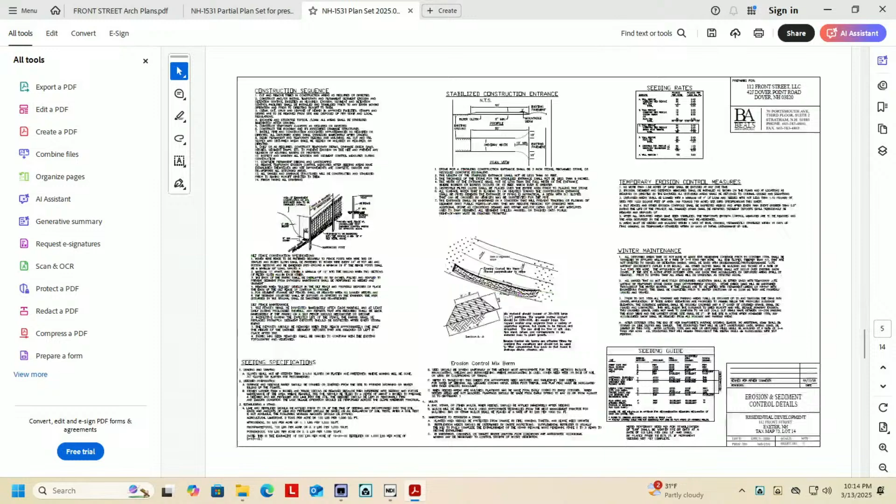So my question on the lighting plan is I'm seeing one pole top light at the driveway entrance, and then a sort of sconce light at the garages. Is there no light at the front of the buildings? Why is that not being shown? On the backside, I'm sure there will be safety lighting for the doors, but that would be it. What about the front, Christian - the front that no one sees? Well, the front along Front Street. Those will have safety lighting, just a canister of whatever John chooses at the door, on the building, like any other front door.

So that won't contribute to site lighting at all? It won't contribute to the photo, like that path that goes along the north fence won't have any light on it? Is that what you're telling me? It'll have a 60-watt bulb, essentially. So it won't contribute to the photometrics? It'll be zero? That's what we were told by Sharon, who did the lighting engineering. Okay.

So those lights will light the driveway and the way to get around out back? Yes. Are they on a common switch? No, those are building mounted, and each one of the units will have its own switch. My assumption is they will likely at night be motion sensored.

So that path that goes around the building to the back won't be lit unless somebody has their door light on. But that path doesn't have a door facing it. Which path? The path that goes around the south side of Unit Q. Yeah, those have doors in them. There's doors on the side? Oh, on the side, no. Yeah, I'm sorry, I thought you were talking about the back. Oh, yep, that's true. Okay.

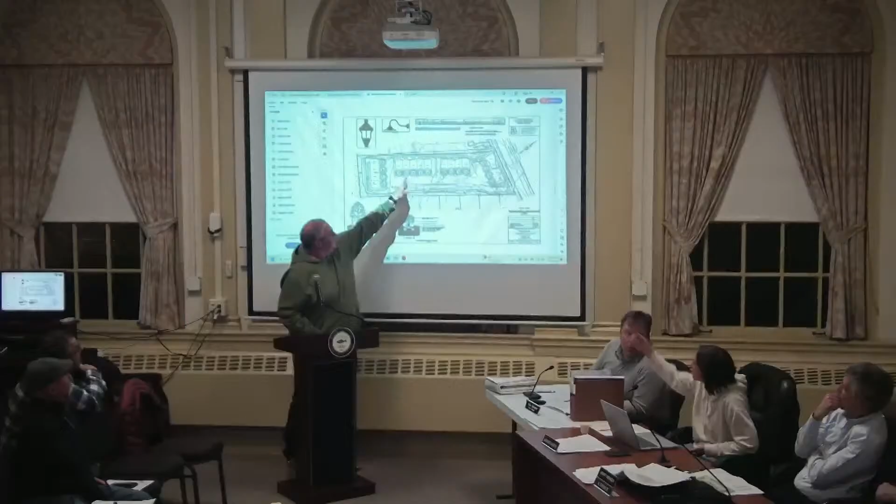Sorry to interrupt, David Harrington again, 114. So I think you're talking about between 114, my property, and the back, who could tell from these plans? I was talking about the lights here, which we can see, but what I hear them saying, portico lights or some kind of lights, there's potentially 16 or 20 lights here in my backyard that are gonna be on a motion sensor, so every time a raccoon goes by, I've got Las Vegas. It's not on the plan. I didn't say there would be motion sensors on the door lights, I said there would be motion sensors on the garage lights.

One of you said portico lights. So is portico lights on this side? I think we need to improve it, it should be on the lighting plan, that's my point. Yeah, I can reach out and get the lights that you expect to be on the structures onto the plan, so we can analyze that as a board.

And the last thing I'll say tonight, is there a way for the public to get these plans solidified as either an as-built, I don't know what you call it? They're incredibly confusing. I've got 16 years of higher education and I can't follow these plans. I can't tell you what's gonna be built on Front Street, I can't tell you what's got a hip roof, what doesn't. Will this come to a final plan before you vote, and will we get to see it?

Yeah, we'll be voting on a plan, and you'll be here if you're here. Will we get to see it beforehand? The week before, typically. It has to be submitted. I don't know how quickly it goes on the website. It goes on the website the week before the meeting. And if the planning board approves that plan, I mean, I've never seen you folks approve a plan that you got handed to that evening. No. Okay, so that's my question.

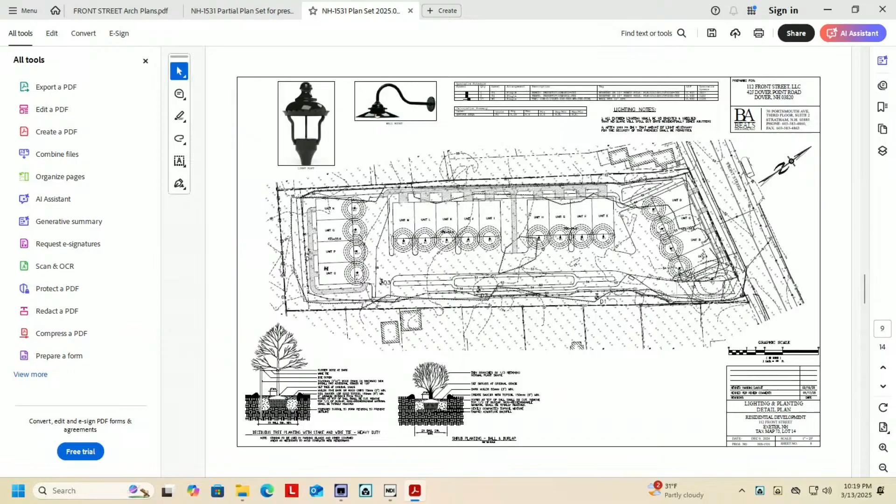On this lighting plan right now, there's just one light in that corner that is approximately 20 feet from my house. So we're certain that they can't put a spotlight on the corner that's not on the plan. If it's not on the plan, they can't hang it, is what you're telling me? They're not supposed to.

They have property rights. Because you yourself could put lights in your backyard if you wanted to tomorrow, that goes with the same thing. Yes, I can. Exactly. So you have more flexibility than they do, because they can't add lighting.

I'm not talking about homeowners adding lighting, I'm talking about them as built. They have to build it to plan. I don't care if a homeowner... yes.

Just like I can put up a stereo system or dogs barking all day long while they're trying to sell their property. Correct, they build it per plan.

But I'm just saying, because then somebody else can come in and buy a home and say okay, I want to put a light here, and they put a light. But as built, we protect people on these type of plans where we don't have that same protection against you putting lights.

Correct, we require all lighting downlit and shielded, so no direct light is visible from abutting property lines. So that's a condition on this, it's not a condition on any of the other houses that surround this. But you understand my concern, it's not drawn right now specific.

There's a lot of, we're gonna do this, we're gonna do that. I potentially could have 16 to 20 lights in porticos going on every time an animal walks by all night long, as drawn. You don't know what's going to happen there.

The lights from this plan should not go beyond the property line. So if you're looking at their property, there's no light drawn there, then you will see lights go off and on occasionally, because you're looking at your abutters. But there's no light right there on the plan, and they're telling me there's gonna be a portico light.